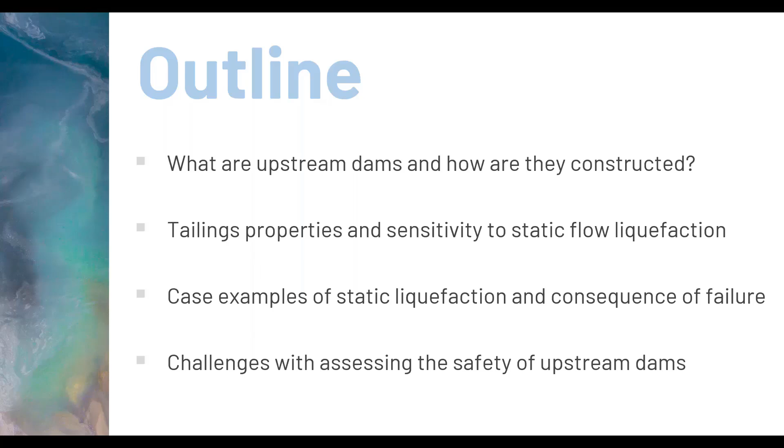Now, what makes upstream dams different? First of all, I guess, is a very simple case. The figure on the bottom left shows a typical upstream dam, which generally starts with a starter dam, and then it's raised during the life of mine, usually with little berms on the outside crest of the dam, with tailings spigoted upstream. You'll see also there's a dashed red line that I put in here, and that is that zone and downstream is essentially the structural zone of the dam. So if this was an earth-fill dam, that would be part of your earth-fill dam. I think it's the appreciation that this section here is really a dam, and we have to treat it as a dam and analyze it as such.

Now, there are thousands of upstream dams constructed around the world, and not all of them fail, obviously, and they have advantages. So I've got a list here of the advantages of upstream dams. They are less cost - basically the structural zone is constructed out of spigoted tailings as opposed to borrow material, which needs to be extracted and compacted in place, which costs more money. Also, there's disturbance of borrow material if you're taking material from downstream of the dam. They can also be progressively reclaimed so that the lower slopes can be reclaimed as you're raising the dam.

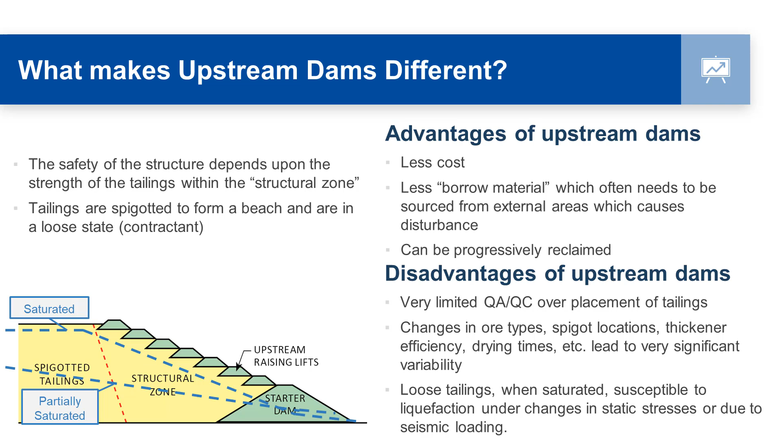Here are some examples of types of upstream tailing dams. The bottom figure illustrates the typical section of a starter dam and raises, shown in green. This figure shows different tailings zones: zone 1, zone 2, zone 3. The idea is you're spigoting the tailings and they segregate along the beach, with a coarser zone on the exterior of the structure and gradually finer as you move into the interior.

This helps reduce the phreatic surface in the dam and improves stability. In this case, the phreatic surface is pretty well along the contact between tailings 1 and tailings 2.

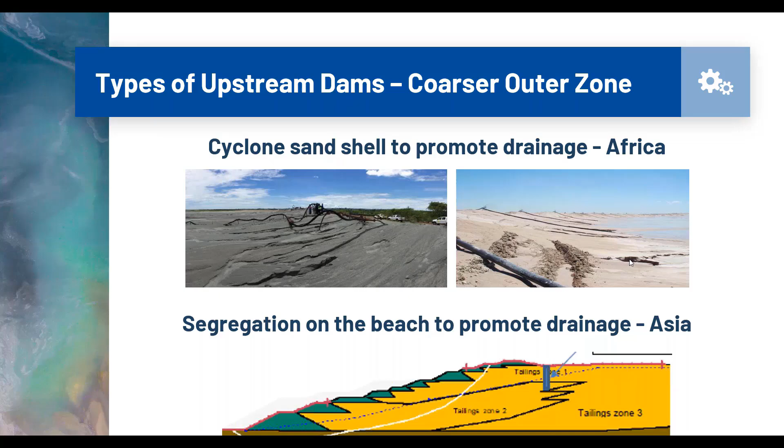The other approach, developed in the mid-60s, was the use of cyclones to segregate sand from tailings. Initially it was used here in British Columbia, with Earle Klohn designing centerline cyclone sand dams. At about the same time, predecessors to Knight Piésold were using cyclones to produce sand to promote drainage on the outer slopes. These are photographs of cyclones on an upstream tailings dam, used to create a wider drained zone of sand.

The other approach taken is desiccation, taking advantage of drying, particularly in arid climates. In South Africa, one example is called day wall construction, where a zone around the outer side is constructed out of tailings placed in a cell and then allowed to dry. This creates freeboard and also creates a stronger outer zone.

It's interesting to note, when we talk about tailing properties, that some tailings from smelter slimes have very unusual properties. You can walk around the outside of some of these dams and hit the tailings with a rock hammer, and it's almost like cement. So we have some quite different properties, and trying to analyze these structures is very interesting.

Another approach is mud farming with the bauxite tailings in Australia, using what's called an Amphirol. It's basically a piece of equipment that goes around the top of the tailings, churning them up and exposing them to drying, which reduces the water content.

There are some challenges with this, in that during the rainy season, tailings can get re-wetted. Also, as the dam is raised, the consolidation of tailings can resaturate the zones that previously had a lower water content.

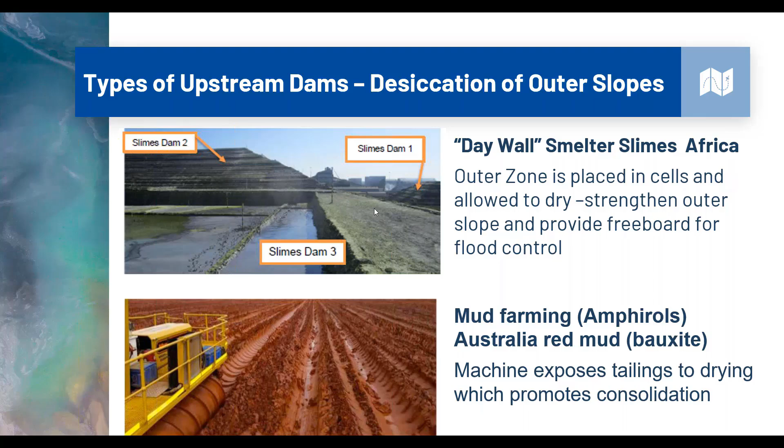This is another example of the benefits of desiccation. This particular dam developed zones that progressively went from the outer embankment, the light green, moving towards the interior of the impoundment. Let's call these tailing zones C, B, and A. Zone C on the outer side, closer to the deposition and with more desiccation, has peak undrained shear strength ratios of 0.6, which is almost approaching a drained strength.

As you progressively move in, you go to 0.4 undrained shear strength ratios, until you're in tailings A, which is basically normal tailings at about 0.23. So here you've got the advantage of a stronger outer zone.

Now there is still some uncertainty with this though. The behavior of the desiccated tailings and its brittleness is uncertain - if it's stressed, does that brittleness break, or do the bonds break, and does the strength reduce? Nonetheless, those illustrate that there are many ways to build upstream tailing dams.

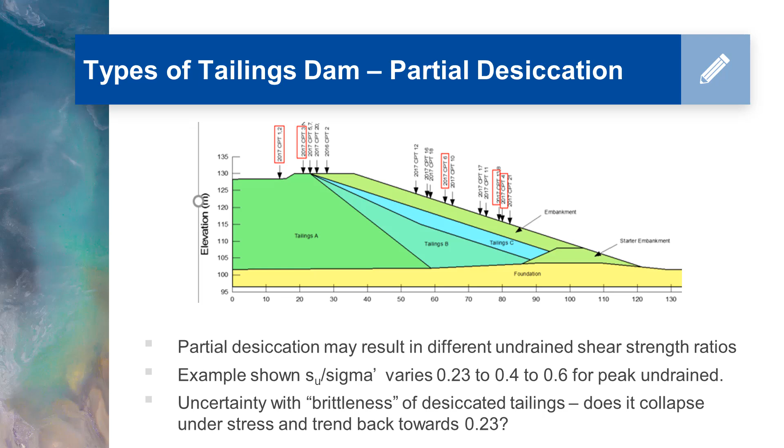The next one is one of my favorites. It's a mine in Sudbury, and this is what we call hard rock tailings - good, competent tailings. There, they spigot tailings out on the beach - it's hard to see, but there are spigot points all along the crest of the beach where the trucks are. A dozer runs back and forth compacting it. So even though this is called an upstream tailings dam, in effect it's a constructed, compacted embankment.

And in this case, the tailings are just spigoted whole. They're not thickened, and you're able to get the compaction.

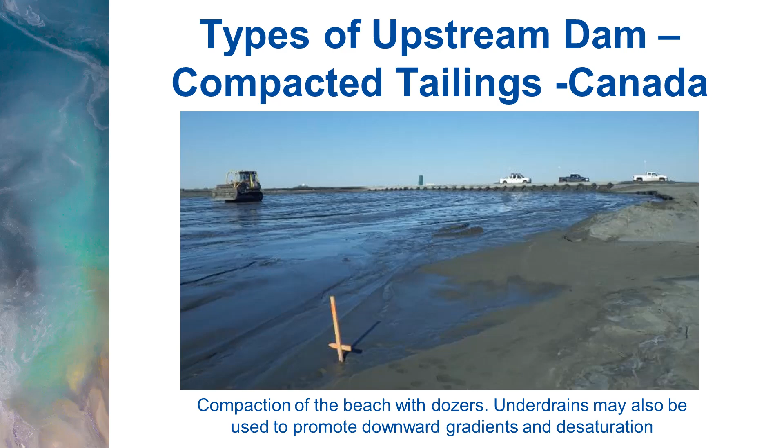So you have this continuum of tailings, and when people refer to tailings as a single product, it's quite variable. Even in one tailings pond, you can have different types of tailings due to segregation and different deposition methods.

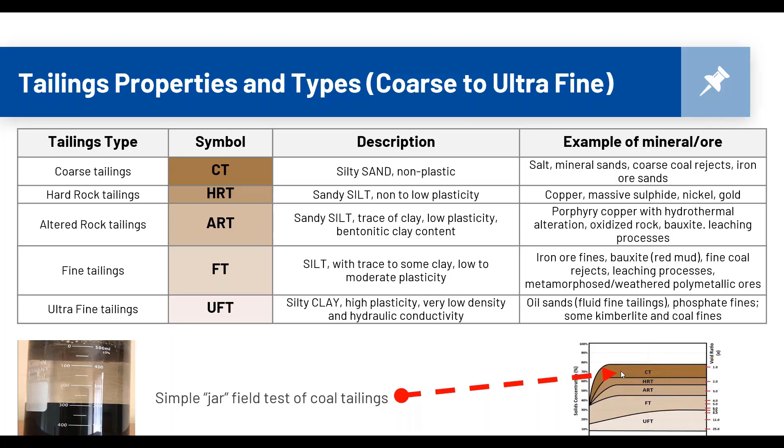They're sitting there basically in what we call a contractant state. If it's stressed, it'll start to collapse, and the denser it gets, the more resistant it is. So we refer to the critical state line - the void ratio versus mean effective stress.

If the void ratio is higher than the critical state line, it's behaving as a contractant material subject to collapse. And if it's below the critical state line with a lower void ratio, as it shears, material tends to open up and pore pressures decrease.

Now, the susceptibility to liquefaction is linked, if you like, to the basic properties of the tailings. That's important because the plasticity chart is still a very valuable tool.

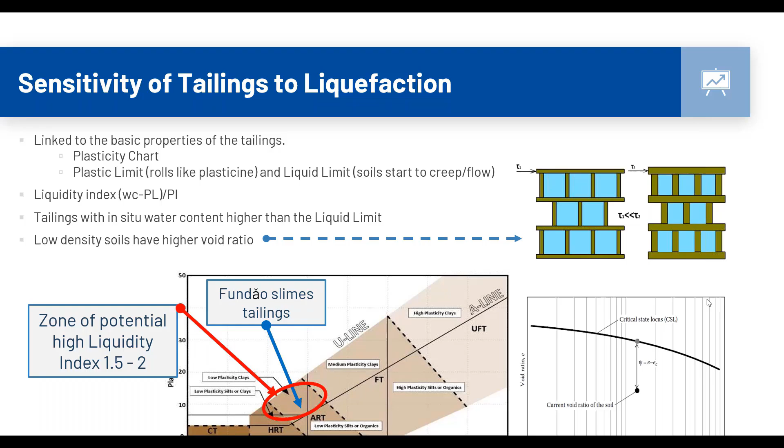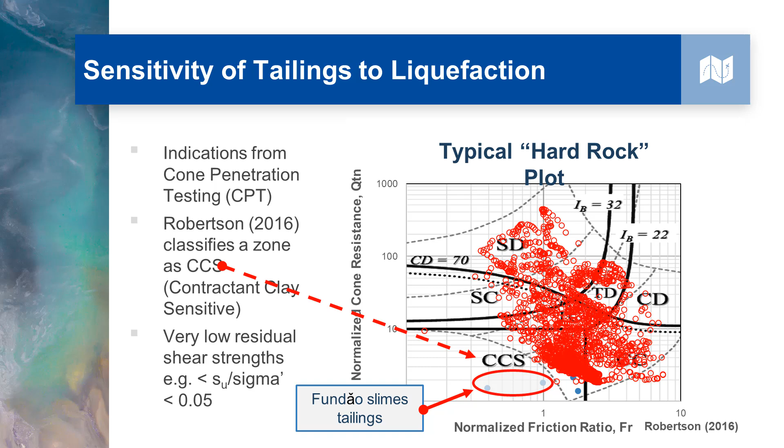Now, what happens when a dam breaks, when it's stressed and fails? Do they fail like Brumadinho, or are there different mechanisms?

At Sullivan, it was Friday afternoon, the last lift of the construction season. The grader operator had to start adjusting his blade because, although he wasn't aware of it at the time, the dam was failing. A pickup truck was near the toe of the dam, and it appeared liquefaction started there with progressive failure. The fine sand and gravel in the foundation liquefied and flowed into the pickup truck, and the driver had to climb out the window. This structure also deformed from about a 4-to-1 slope to about a 7-to-1 slope.

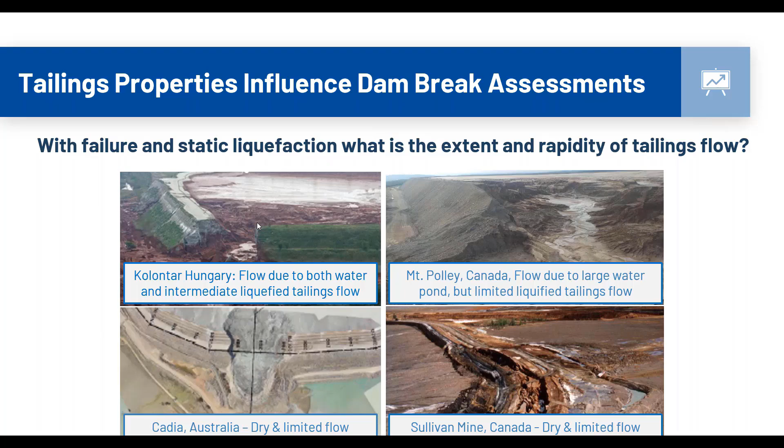So when we're thinking about dam break assessments, we have to be thinking about these key mechanisms.

Your prime mechanism is certainly water. The more water you have in the tailings pond, when it breaks, that water will transport tailings. A rule of thumb I've used for years is that a cubic meter of water can wash a cubic meter of tailings. So limiting the quantity of water you can have in your tailings pond is important.

In assessing your extreme consequences, it's looking at, in extreme flood conditions, how much water can I get in the impoundment?

The secondary mechanism is static liquefaction. Is the tailings you're dealing with sensitive to static liquefaction? Is it going to behave like Fundão and Brumadinho, or will it behave more like Cadia and Mount Polley? You need to assess each structure and its susceptibility to flow liquefaction and flow.

The other component to think about is seismic conditions. Virtually all tailings are loose, and when saturated and subject to sufficient seismic loads, they will liquefy. So with seismic conditions, you're looking at widespread liquefaction of tailings within the structure and the run out of the liquefied tailings.

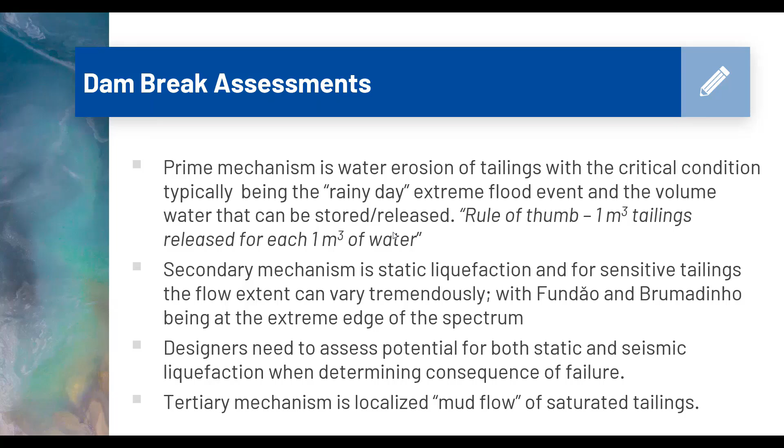My next few slides deal with some of the issues of assessing upstream tailing dams. One common issue we've had is understanding what is the seismic response of the tailings to seismic loading. The other component is what we call static bias, which accounts for the stresses in the sloping dam.

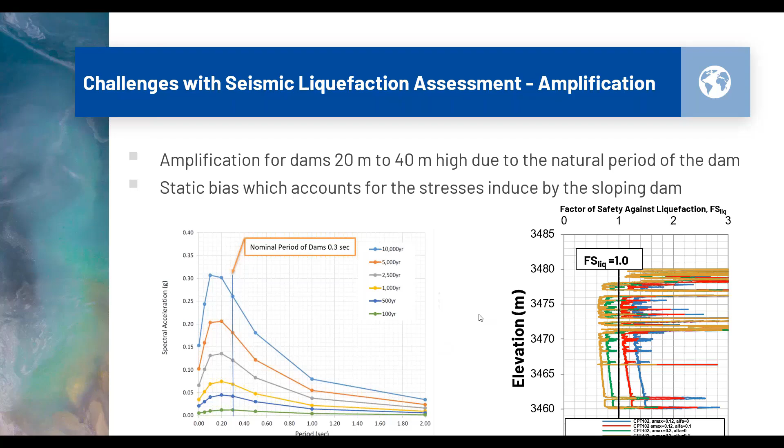The next challenge with upstream tailing dams is interpreting the properties of the tailings. I've mentioned it's a heterogeneous product, and it's important, particularly with CPT testing, to understand what it's teaching us and what is reasonable to learn from the data.

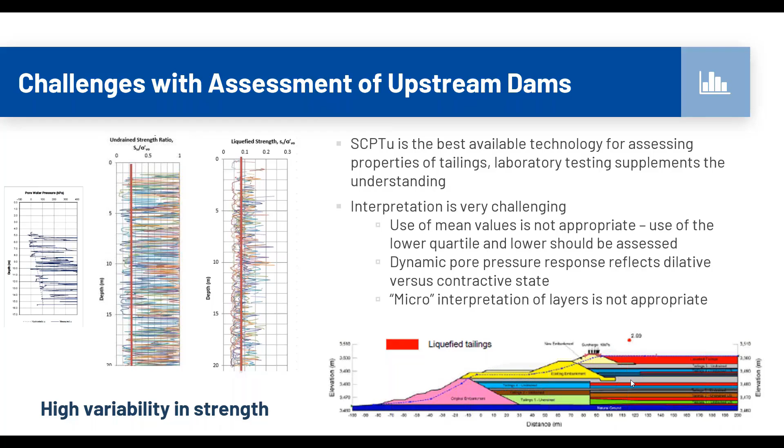The other aspect is what I call micro-interpretation of layers. This is an example where someone had interpreted the CPT data and come up with something like 10 or 12 different layers of tailings. I think the reality is, with the variability and distribution of tailings properties, believing that we can actually analyze or interpret discrete layers within the tailings is unrealistic.

So my last comment on challenges with upstream tailing dams is in the analysis. The limit equilibrium analysis is basically average factor of safety along the failure surface, and it doesn't always indicate where you may have stress concentrations.

This is a particular example where we modeled it with slope stability analysis, plotting out the factors of safety, and the red zones here are where the factor of safety is less than 1. So you have to be cognizant that zones of low factors of safety can initiate failure and lead to progressive failure of the structure.

The challenge to confidently predict the soil behavior in the stress state is difficult. We get undisturbed samples in the field, which require the use of thin-walled samplers and very careful sampling, transport, and X-ray of tubes to assess whether we're getting any disturbance, and then we carry out laboratory tests under very controlled conditions.

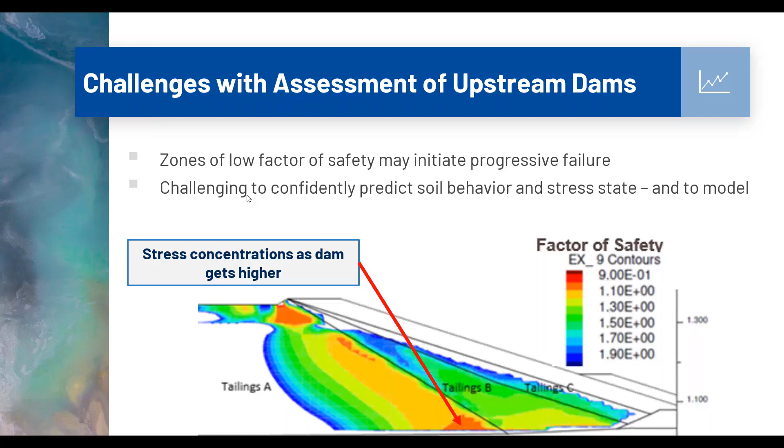So in summary, upstream tailing dams have a long history in the mining industry, and there are thousands around the world. Are they all unsafe? No, but the actual factor of safety is less than we think. Typically, if you have a 3-to-1 slope and the static drained factor of safety of 1.3 to 1.5, your undrained strength factor of safety is probably close to 1.

The triggers for static liquefaction are difficult to predict. There's uncertainty in material properties, uncertainty in stress state, and even understanding what can trigger static liquefaction and the accuracy with which you can predict that is a challenge we face. A factor of safety greater than 1.5 for peak static undrained shear strength may be adequate, however not in all cases, and has to be considered on a case-by-case basis and on the tailings properties, amongst other things.

Now, the preventative practice is to assume liquefaction could occur and adopt a post-liquefaction condition. But I do have to discuss, even when we talk about the post-liquefaction condition, what is the post-liquefaction undrained shear strength.